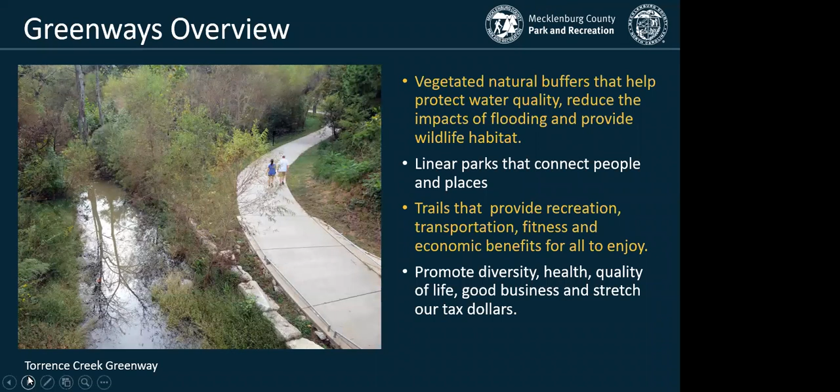Paved walking and biking trails are the #1 requested amenity by residents of Mecklenburg County, according to the citizen surveys completed as part of our 2015 and current 2020 master plan update. Our current master plan calls for over 300 miles of greenway trails along creeks and streams, and 200 miles of urban trails along roadways and through urban areas.

Currently, more than 55 miles of greenway trails are completed with a goal to add 30 miles of new trail between 2019 and 2023. To accomplish that goal and to meet community demand, we and our partners are working on an accelerated greenway plan that includes over 40 miles of trail currently in design or construction.

This map shows the locations of all greenway projects we are working on through the Accelerated Greenway Plan. The blue dots indicate projects which are funded through our 5-year capital improvement plan. The magenta dots represent the 5 new projects that were funded last year to meet community demand and to increase access to our trail network.

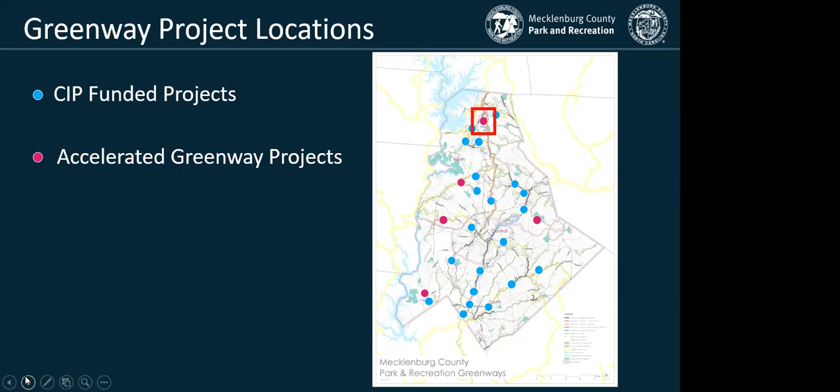The Caldwell Station Tributary Greenway Project is an accelerated greenway project in northern Mecklenburg County within the town of Cornelius. Caldwell Station Trib Greenway is shown on the map on the left in orange and circled there in magenta. The black lines show our existing trails, and the dashed lines show future trails that are currently unfunded.

This project will connect existing Caldwell Station Greenway, which is the black trail to the left of what's circled, to the new Northern Regional Rec Center, which is currently under construction. Existing Caldwell Station Greenway, which is shown on the map on the right, is approximately 2.3 miles and starts near the intersection of Statesville Road and North Cross Center Court. It ends just north of the intersection of Old Statesville Road and Bailey Road.

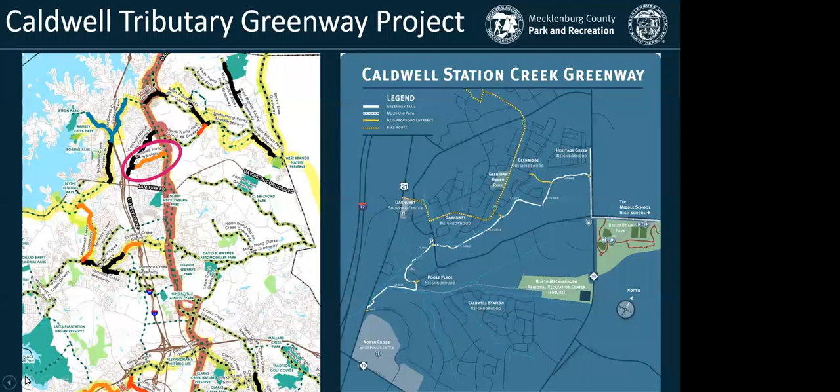We wanted to give you a quick update on Northern Regional Rec Center because I know you folks probably drive by it every day and are curious about the status of it. So as you probably know, we started construction around January of this year, and we anticipate that we will complete the project in late 2021.

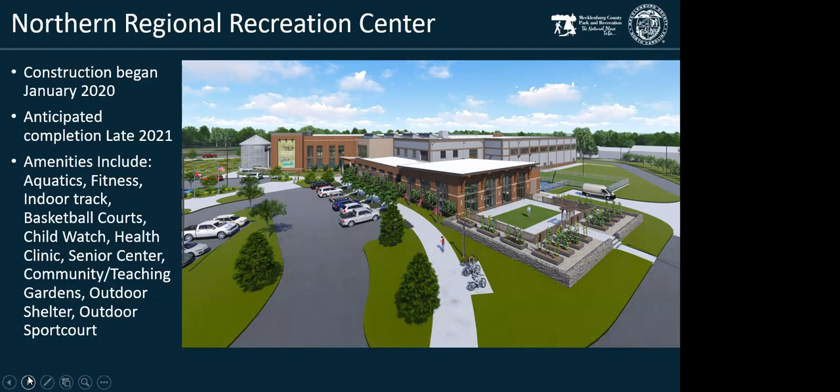The amenities that will be available once the facility is open include aquatics, a fitness and senior center, gardens, and outdoor recreation options. Folks will be able to use the rec center through what we call the MECK Pass, which is a monthly fee that ranges from $22 for youth and seniors to $65 a month for families. And you'll have access to all the amenities available there should you want to purchase one of those.

Here's a site plan view of the Northern Regional Rec Center. As many of you probably have seen, they are making a temporary trail connection to Caldwell Track Drive. Additionally, the trail through the rec center site will connect to the sidewalk on Old Statesville Road. It's anticipated that the town will fill in 2 critical sidewalk gaps on Old Statesville Road around the same time that the rec center will open.

Filling in these gaps will allow a pedestrian to walk from the new rec center to downtown Cornelius going north, or to the main entrance of the Caldwell Station neighborhood going south. Now I'm going to turn our presentation over to Juan Morales of Alta Planning and Design, our consultant, to walk you through the different elements of our Greenway project.

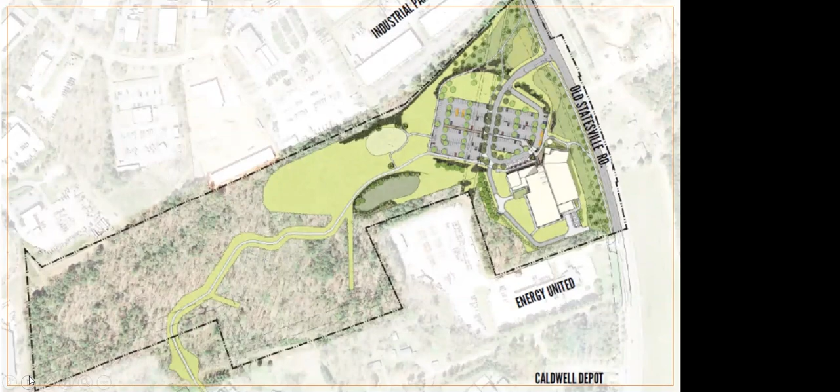Thank you, Katie. Can you hear me well? We can. Thank you, Juan. All right. So, hello, everybody. I'm Juan Morales with Alta Planning and Design.

As Katie mentioned, the Caldwell Station Tributary Greenway is generally located between Statesville Road and Old Statesville Road, to the northeast of the North Cross Shopping Center, and to the southwest of Bailey Road Park. That's the general location, and this map shows that general location of the Greenway. The project consists of an approximately 1 mile long trail that connects the existing Caldwell Station Greenway to the new Northern Regional Recreation Center that is under construction, as Katie mentioned.

The Greenway runs parallel to the Caldwell Station Tributary Creek within the Duke easement, and is designed to include 2 neighborhood connections, one at Caldwell Depot Road and the other one at Caldwell Track Drive. The design team is currently looking at options for a potential connection to the Hyde Park development. Next slide, please.

All right, so starting on the west end, the new asphalt trail shown in green will start at the existing Caldwell Station Greenway. You can see that connection on the aerial photograph shown on the left. The new Greenway will connect approximately on the red dot that is being shown on the slide, and it's just to the south of the neighborhood connection at Psalms Street. In this area, the trail will run on the north side of the creek and at the back side of the residential and commercial properties. Next slide, please.

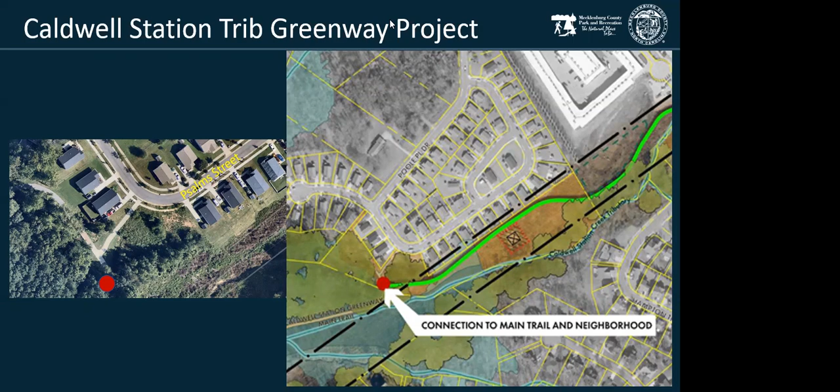As the trail continues to the northeast, it will cross the creek twice. Between these 2 crossings, the trail will stay at the south side of the creek and will run between the residential lots and the Duke transmission tower. The Caldwell Depot Road connection will be located right after the first crossing, where the Greenway will have a concrete surface and connect to the existing sidewalk. After the second crossing, the trail transitions to the wooded area and runs on the north side of the creek. Next slide, please.

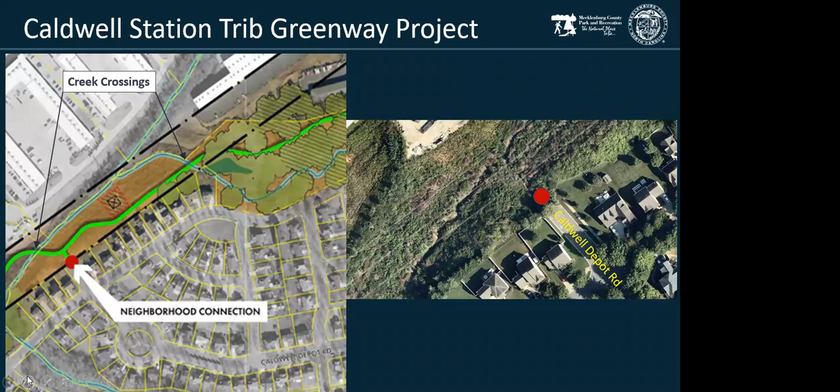On this final segment, the trail will remain on the north side of the creek until it connects with the Regional Recreation Center trail that is currently under construction. The aerial shown on the left side of the slide is pretty recent and kind of shows what is currently going on at the site. As part of the project, the temporary connection to Caldwell Track Drive will be enhanced to create a community focal point that we're going to show on the next slide, but I'm going to transition that to Katie, I guess.

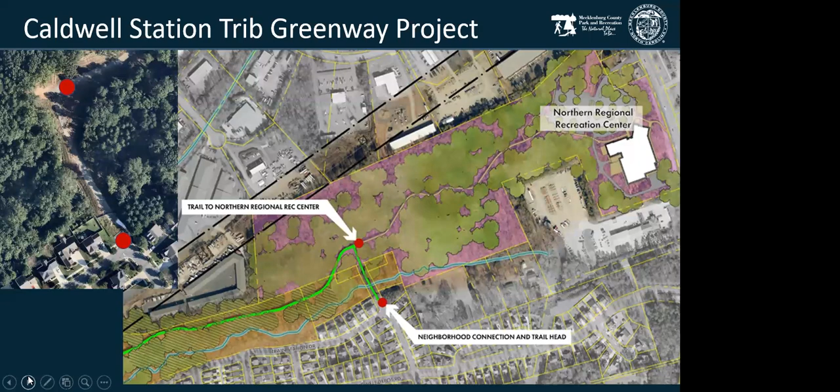Thank you, Juan. Yeah, so as I mentioned previously, the Regional Recreation Center is building what we're kind of calling a temporary connection to Caldwell Track Drive, and temporary meaning that we're going to do some enhancements there, and it won't be just a sidewalk, essentially. So if you were able to play around on our website at all, you saw that we provided 2 concepts for what that might look like at Caldwell Track Drive.

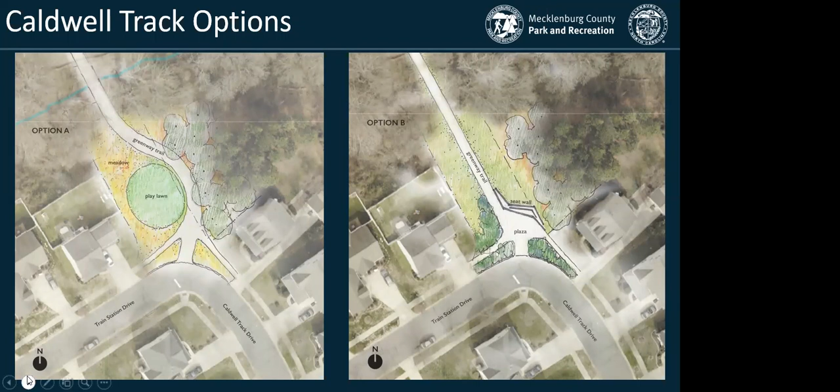The polling that we conducted through the public input website for this project showed that 62% of respondents preferred the plaza option, with 38% preferring the lawn option. The final design for this area is not yet determined, but we realize that there's a need to balance the design with the interests of both the residents in the immediate vicinity and the community at large. And it's worth noting that the folks who live really close by really prefer that lawn option. So we're certainly taking all of that feedback into consideration before finalizing anything.

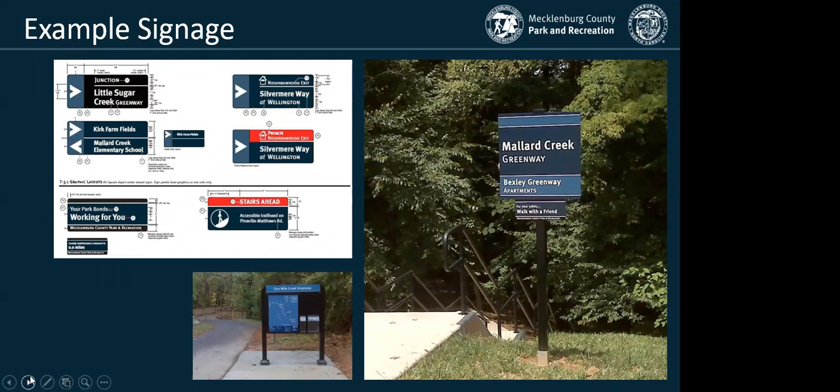Finally, this is an example of our wayfinding signage package that we use across the entire county. We have pedestrian scale signs at entrances and along the trail to indicate mile markers. At points, we also include kiosk signage to show maps, rules, and other important information. In addition to signs, benches, garbage cans, and mutt mitt stations will also be provided at various points along the trail. We are also currently in the process of adding benches along the existing Caldwell Station Greenway, which many of you probably use and have noticed that they don't exist there currently.

We're excited about the opportunity to get this trail on the ground as soon as we can. Our current goal is to complete the design and permitting by spring of 2021. This allows us time to finalize the real estate acquisition process and put the project out to bid sometime next spring. We hope to begin construction next summer and complete the project in spring of 2022. While these are our target dates, please note that any delays in real estate or permitting can extend the timeline for completion.

At this time, we'd like to go over some of the questions that were submitted through the website. We, by the way, got great feedback and great participation. As y'all are probably aware, this whole virtual platform is new to everybody. So we're really getting our groove with some of this, and it's really fun to see folks catch on to these things and really participate at the level that they are.

So one of the questions we were asked was, who would be responsible for maintaining the trail? So Mecklenburg County Park and Recreation is building and maintaining this trail. So once the trail is on the ground and you need to contact anybody for any reason, whether it's a maintenance issue or what have you, you will call Mecklenburg County Park and Rec.

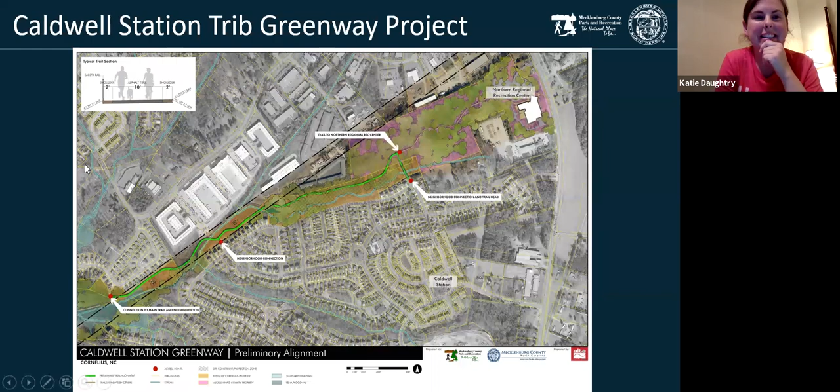So I have a couple questions. Is construction going to be set at the same time as the first entrance? And what is the design for that? So I'm going to let our consultant take that question. So Juan, if you don't mind. Yes, I was trying to unmute on two sides. Can you repeat that question? My connection missed a little bit of it, and I just want to make sure that we can answer that well.

Sure. I live literally right next to that red dot in the middle there, the second entrance. My house is right there where that dead end is, on the left side of it. My question is twofold. Is that entrance going to be in construction the same time as the first one? And two, we've seen mock-ups of what the first entrance will look like at the Caldwell track, but are there any mock-ups of what it's going to look like at the second entrance?

All right, so these trails are constructed generally from one side to the other side. We don't know yet where we're gonna start, but if we start at the east, we're gonna end construction at the west, and if we start at the west, we're gonna end at the east, because all the construction materials are gonna be stored and staged along the area that is being disrupted. In other words, we're not gonna open disruptions all over the place. So we'll pick one side. Short answer is no, they're not gonna be done at the same time.

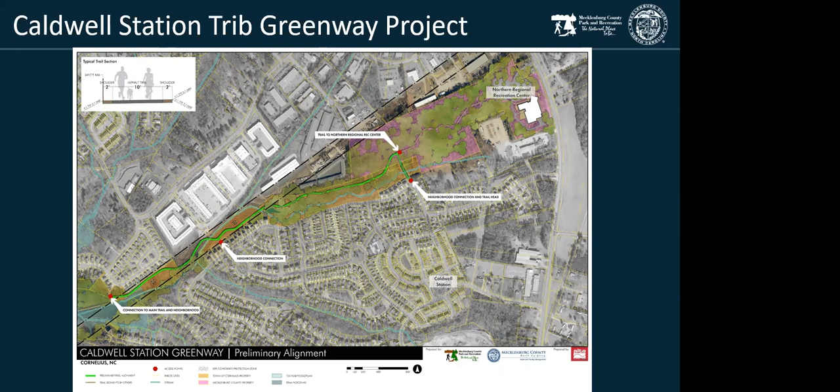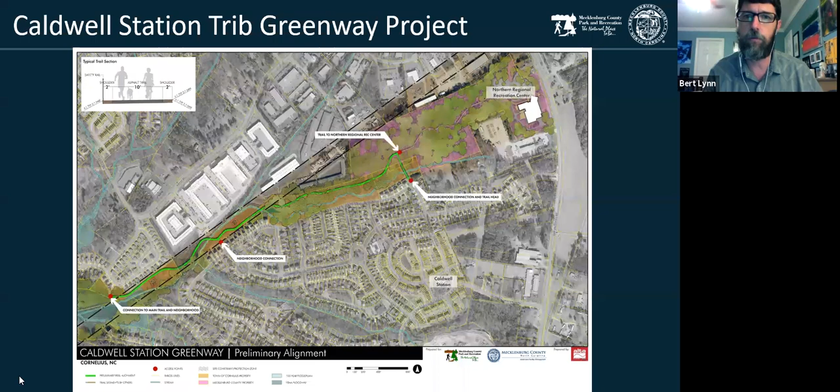Okay. I don't think we've had any other questions posted in the chat. So let's move through the final couple of slides, and then at the very end, if anybody has additional questions, we can get to those.

Thank you, Bert. So one quick note before we wrap this up. Mecklenburg County is currently going through an endeavor to update our master plan for our countywide system. So we would really encourage folks to go to meckplaybook.com for more information on that. We had some public meetings back in September, but there's lots of information posted on the website where you can provide us with some additional feedback. I believe that closes October 31st. Am I correct about that? Yeah, so we've got a little more time for folks to participate in that planning effort, and we encourage everyone to do so.

We certainly appreciate everyone's feedback tonight, and we've had great participation so far. So thank you to everyone for taking a little time out of your evening. And we look forward to this project getting started, and we hope that everyone really enjoys this new amenity in their community. Katie, before we go, I wanted to give Mecklenburg County Park and Recreation Director Lee Jones the opportunity to share some closing thoughts. Sounds great.